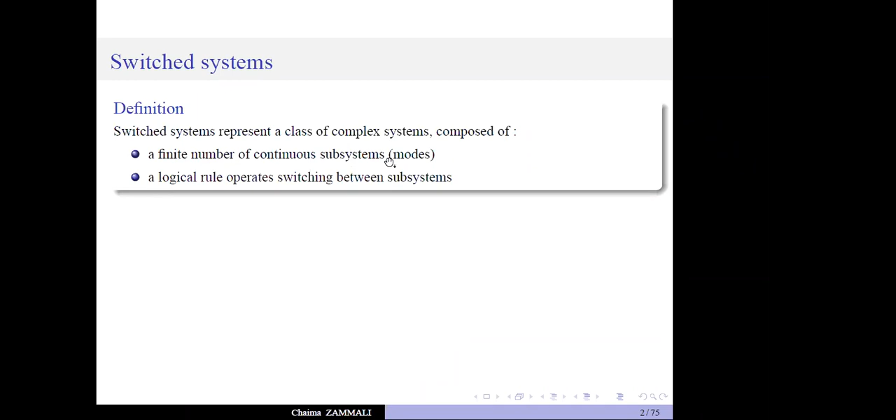The main interest of studying switched systems is justified by their hybrid dynamics, continuous and discrete, and their ability to represent and control a wide range of industrial systems in many engineering fields, such as opening and closing power switches, biological cells duplication and division, aircraft moving safely through the airspace system, and many other examples.

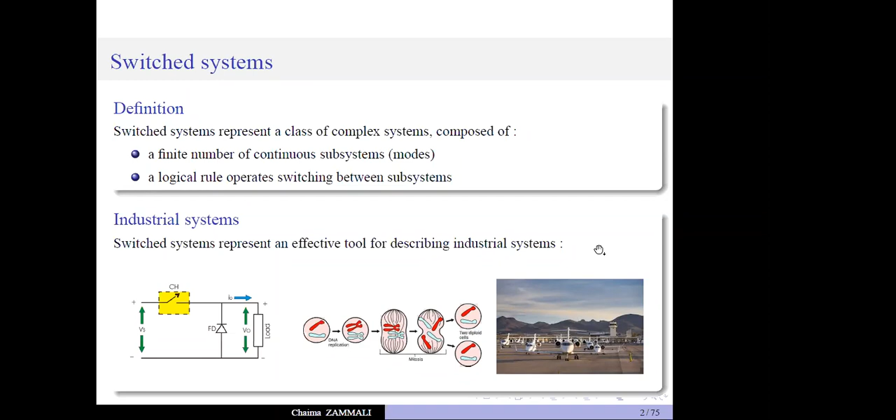Over the last years, switched systems have been widely studied in the frame of state control, state stability, state estimation, and fault diagnosis. In the context of this project, we are interested in state estimation and fault detection for switched systems. In fact, in most practical cases, the entire state cannot be completely measurable.

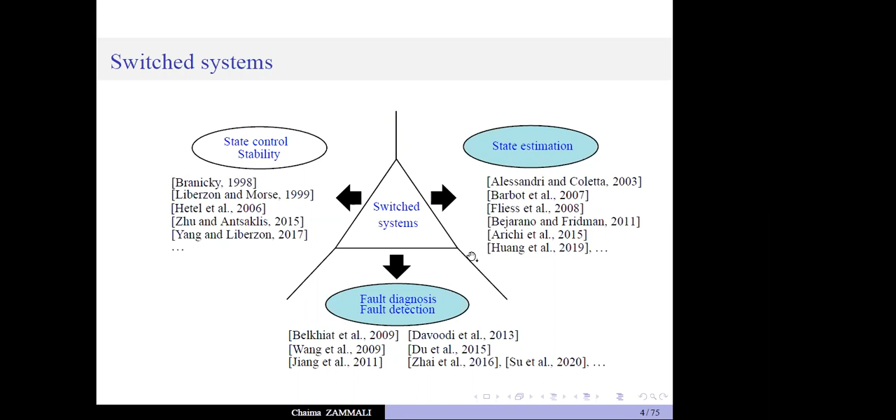This is due to technical or economic reasons, like the high cost of sensors or their insufficient precision. So the implementation of a state estimation algorithm is needed in order to reconstruct the internal state vector from the input and output measurements. This step, the state estimation step, is primordial in order to deal with fault detection for switched systems. Let us begin with the state estimation topic.

A number of results are available for the estimation problem using Luenberger observers, Kalman filter, sliding mode observers. Other observers like adaptive and unknown input high gain observers are also investigated in order to solve the estimation problem.

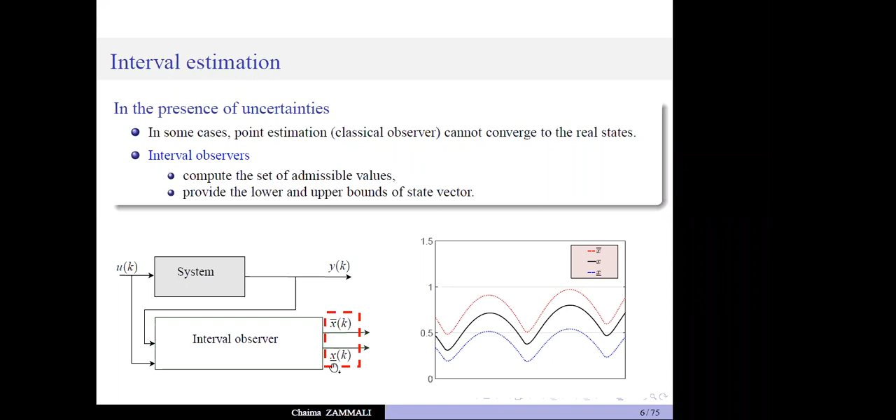Most of the existing results focus on point estimation, which in some cases cannot converge to the real state due to the presence of uncertainties. To handle this problem, interval observers are considered as an alternative by computing the set of admissible values and providing the lower and upper bounds of the state vector.

In the literature, interval estimation has been introduced for biological systems in the work of Gouze, and then applied for different classes of systems, such as linear time invariant systems, linear time varying, linear parameter varying, and nonlinear systems.

Interval estimation has been also considered in the case of continuous time as well as discrete time switched systems. Actually, most of the existing results on interval estimation for switched systems are developed in linear time invariant settings.

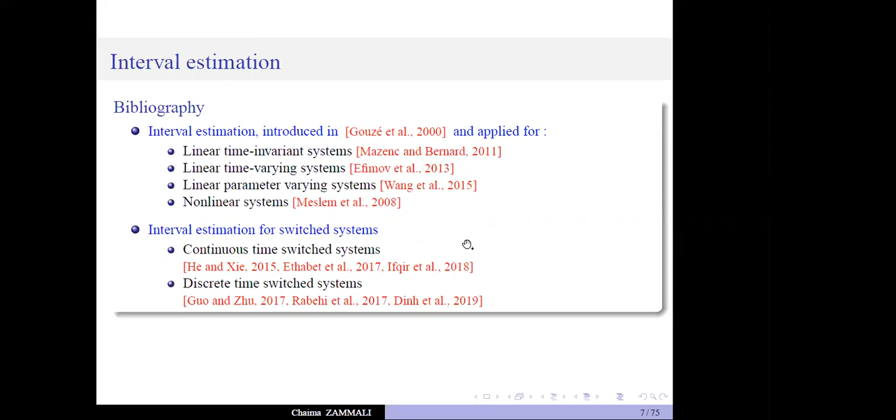That's why the main challenge of this project is to propose a new interval observer for a class of linear parameter varying switched systems subject to unknown but bounded disturbances and using a polytopic formulation. The main advantage of using the LPV formulation is that it provides an elegant way to deal with nonlinear systems.

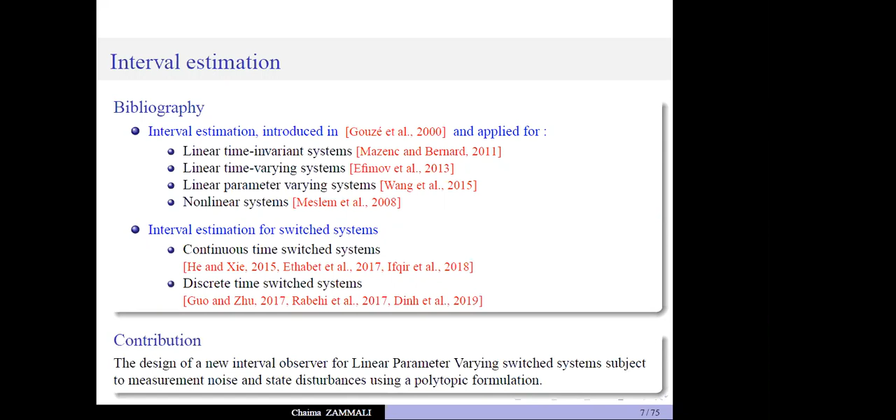As mentioned before, the state estimation is primordial in order to deal with fault detection. And as well as interval state estimation, interval observers have been also proven to be effective in fault detection.

In fact, they can deal with large uncertainties, and they can provide a systematic way for residual evaluation without designing residual evaluation functions and threshold generators.

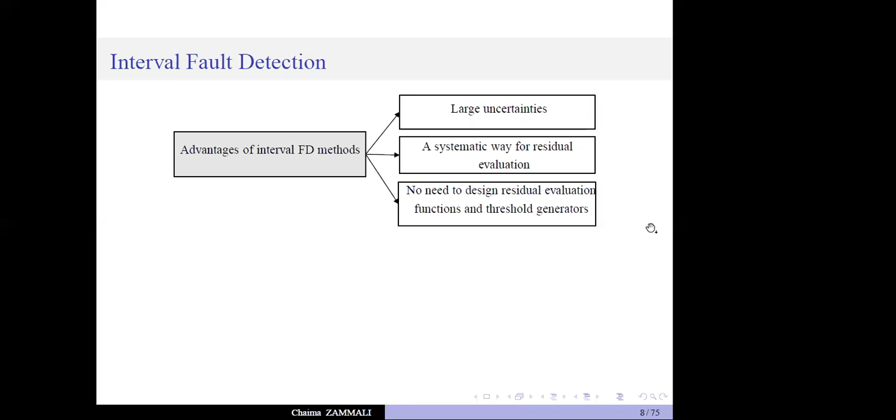In the literature, interval observers have been considered for uncertain linear systems, nonlinear systems, linear parameter varying, and more recently for switched systems in order to deal with fault detection.

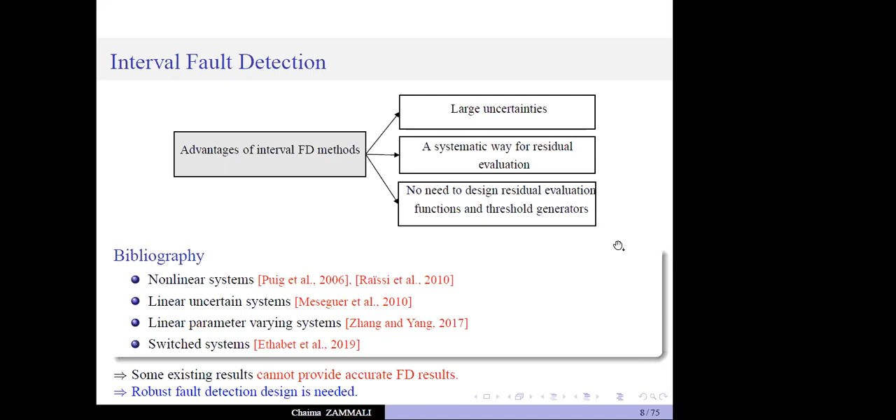However, most of or some existing works cannot provide accurate fault detection results since the effect of uncertainties is not minimized. That's why one of the essential requirements is to consider robustness against uncertainties.

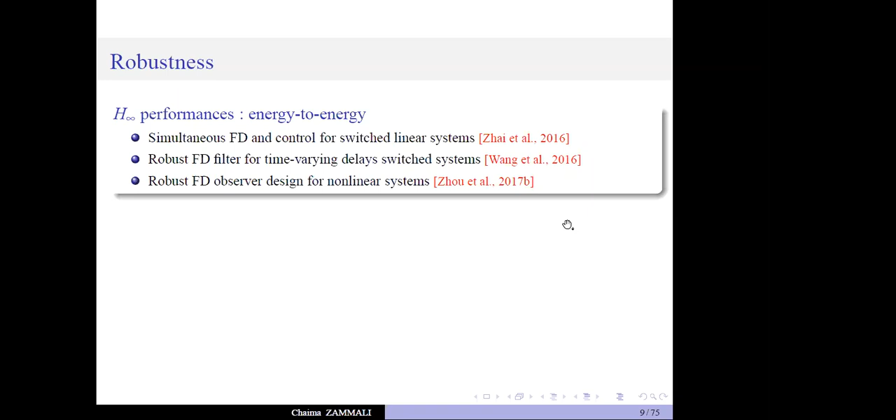Robustness can be analyzed using the H-infinity performances. In fact, the H-infinity norm is a measurement of energy to energy gain, which requires that the uncertainties should be energy bounded. However, from a practical point of view, some signals cannot always be considered energy bounded, but have instead bounded peak values. Therefore, it is more reasonable to use the L-infinity performances, which describe the peak-to-peak performance index.

In the context of this project, we aim to propose an interval method to detect sensor faults for a class of discrete-time switched systems using the L-infinity formalism.

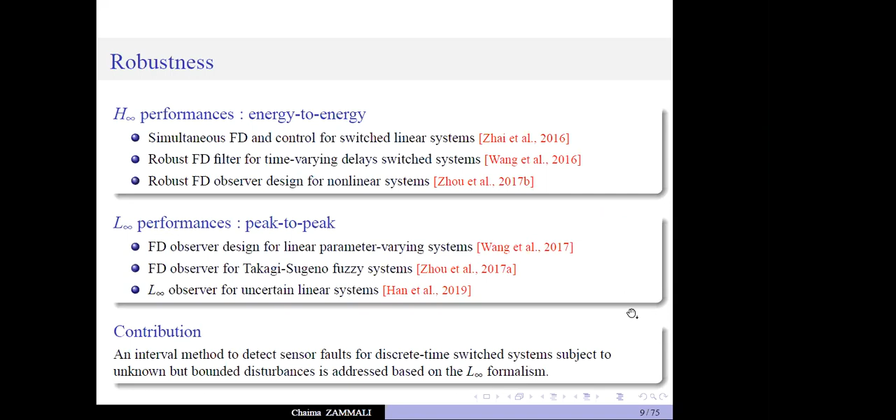On the other hand, interval methods are based on positive system theory, which requires that the error system is simultaneously cooperative and stable, which is a restrictive and conservative assumption. That's why some authors propose a coordinate transformation to relax the cooperativity constraint. However, it is still hard to merge the coordinate transformation with some performance constraint.

So in view of this major problem, zonotopic and ellipsoidal analysis are developed in order to provide accurate fault detection results without considering the cooperativity assumption. To the best of our knowledge, zonotopic and ellipsoidal analysis for switched systems in order to deal with fault detection have not been fully considered in the literature.

That's why the first contribution is based on a novel robust fault detection method using a novel pole assignment technique, which is used to improve fault sensitivity and where the residual evaluation is based on the zonotopic method.

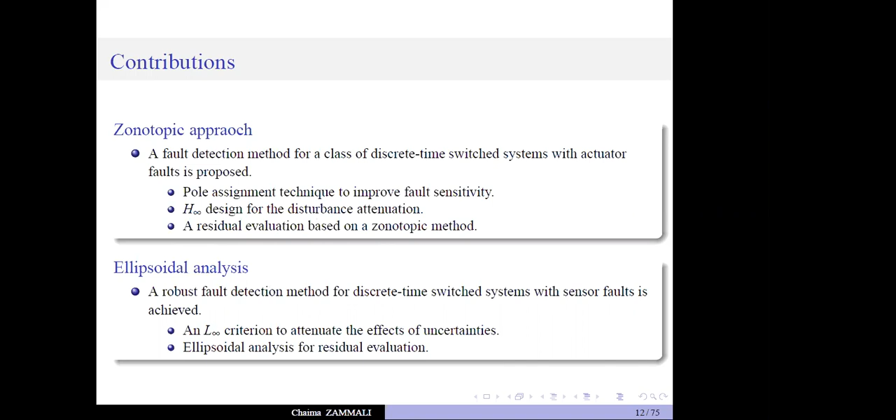In the second contribution, a robust fault detection method is considered using L-infinity performances with ellipsoidal analysis.

So after introducing the context of this presentation, we are going to give some results about interval estimation in the case of synchronous switched systems, and then set membership fault detection frameworks for switched systems will be presented using interval, zonotopic, and ellipsoidal analysis. And finally, we give a conclusion.

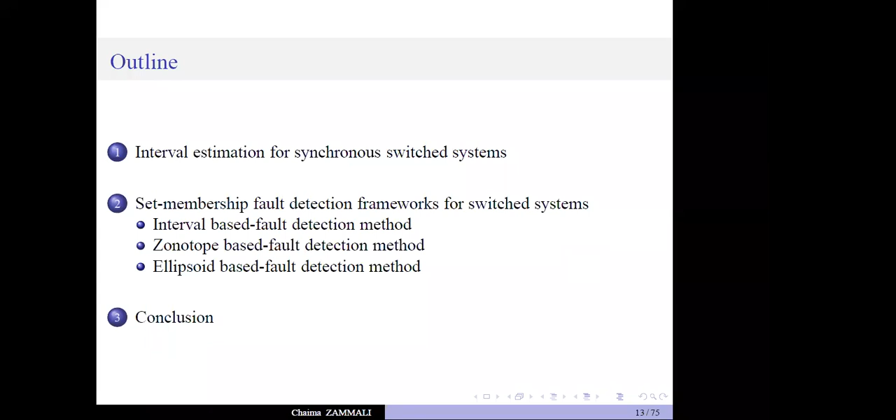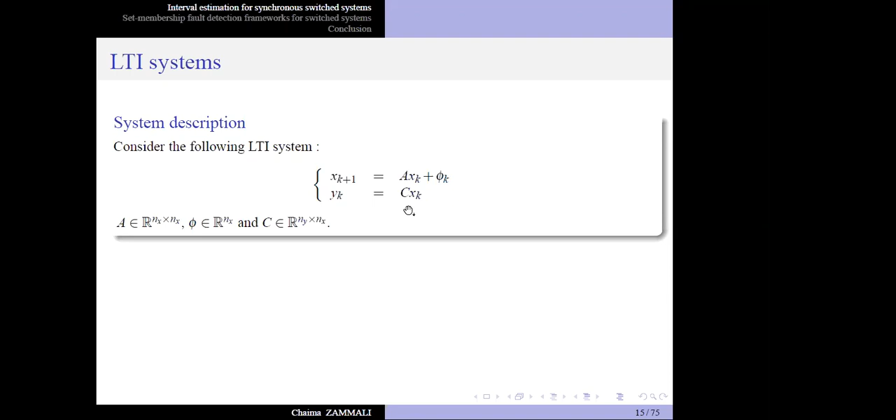We begin by the interval estimation in the case of synchronous switched systems. We consider the following linear time invariant system, where the matrix A is the state matrix, phi is the input function, and C is the output matrix.

For this system, we assume that there exist two known functions, overline and underline phi, such that phi is between two bounds. We suppose that the initial state x0 satisfies the following inclusion. We assume also that there exists a gain L such that A minus LC is Schur stable and non-negative. And finally, the pair A, C is supposed to be detectable.

Under these assumptions, the goal is to estimate two states, an upper state, which is noted by overline X, and a lower one, which is noted by underline X, satisfying the following inclusion.

The interval observer structure, which is proposed by several authors in the literature when considering a linear time invariant system, is given by this set of equations, where L is the observer gain to be designed to satisfy two conditions.

The first condition is the cooperativity property, which means that the state stays between two bounds. And the second condition is the stability of the upper and lower bounds of the estimation errors.

We begin by the cooperativity property. Here we have the definition of a cooperative system. So if A is a non-negative matrix, x0 is higher or equal to 0, and uk is higher or equal to 0, then we can say that this system is cooperative or non-negative.

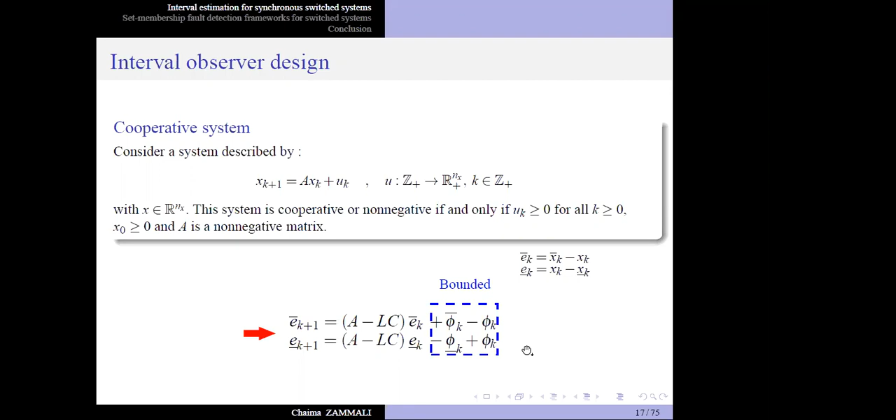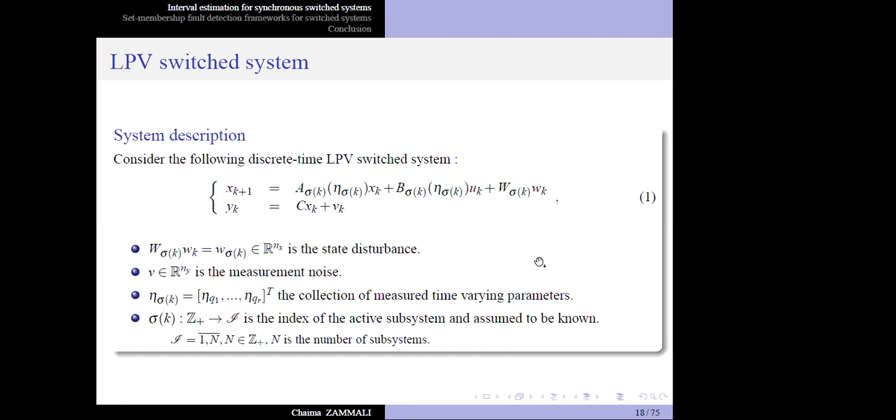We consider in this presentation the following discrete time LPV switched system, where W sigma is the state disturbance, V is the measurement noise, eta sigma is the collection of measured time varying parameters, and we denote by sigma the index of the active subsystem, which is supposed to be known. For ease of notation, we will use Q as the index of the active subsystem.

Some assumptions are required to design the interval observer. First, AQ and BQ depend affinely on eta Q. We assume that the initial state x0 satisfies x0 between two bounds. The measurement noise and the state disturbances are unknown but bounded, and eta Q are constrained in polytopes which are noted by EQ, and we denote by eta QI the vertices of each polytope. And finally, for all the vertices, the pairs AQ, eta QI, C are detectable.

Under these assumptions, the goal is to design an interval observer for the class of discrete time linear parameter varying switched systems using a polytopic formulation. To that end, the proposed interval observer structure is given by this set of equations, where LQ are the observer gains to be designed to satisfy the cooperativity and the stability conditions.

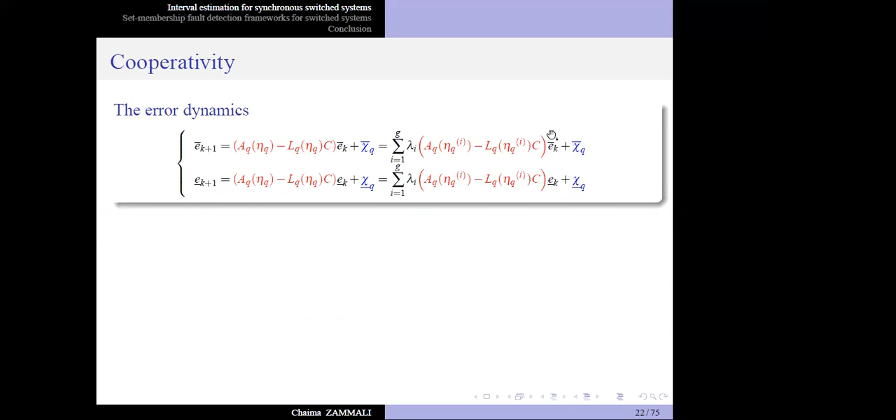Also, the same thing for LQ eta Q: it is equal to the sum over I of lambda I LQ eta QI, where these matrices are the vertices of the observer gain of each polytope. According to the convex form, the error dynamics can be expressed on the vertices of each polytope.

So proving that these matrices are non-negative is reduced to proving that these matrices are non-negative on their vertices.

In addition, we have overline chi higher or equal to 0, since the state disturbance and the measurement noise are supposed to be unknown but bounded. By construction, we can prove that the state is upper bounded, and the same arguments could be used to prove that the state is lower bounded. Thus, this inclusion is satisfied: the state is between two bounds.

So, apart from the cooperativity assumption, which is relaxed thanks to the polytopic shape of the time-varying parameters and expressed on the vertices of each polytope, the stability of the proposed observer should also be satisfied.

To that end, we begin with the definition of stability analysis, which is the property of a system to return to its equilibrium point after it has been deviated from its initial position.

In the presence of unknown but bounded disturbances and noises, input-to-state stability could be introduced. In fact, it provides a framework about stability with respect to input perturbations. It means that a system should be bounded if bounded inputs are injected, and should converge to equilibrium when inputs tend to 0.

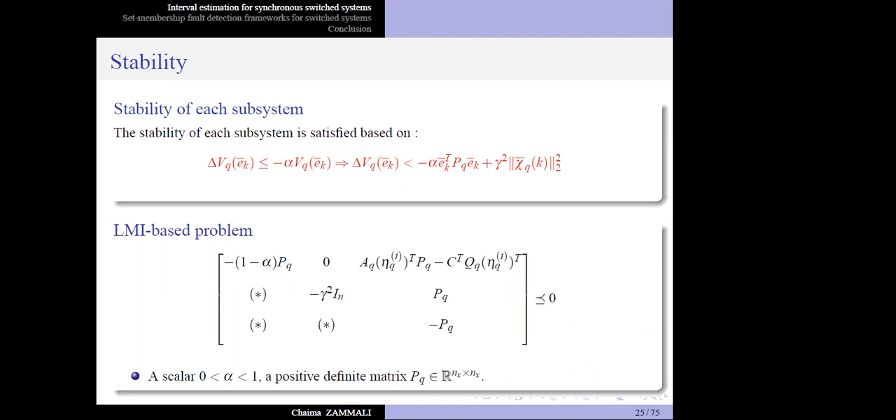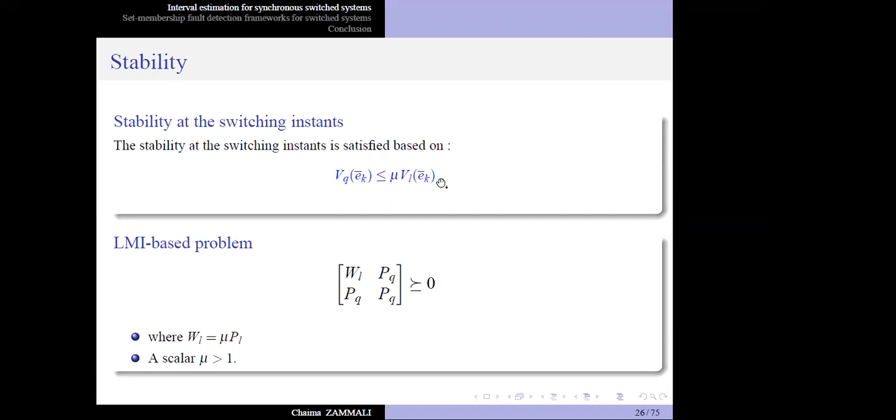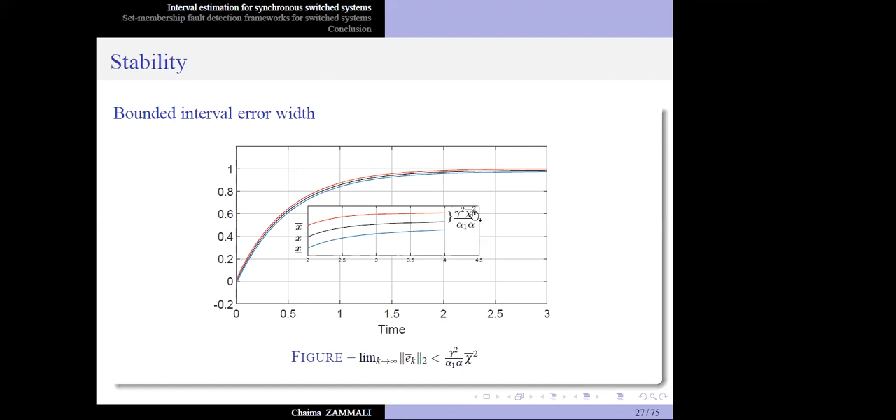In addition, it can also be easily shown that the upper estimation error is bounded by this expression, which should be made as small as possible in order to enhance the performance of the proposed observer. So minimizing this expression is reduced to minimizing the value of gamma.

In addition to minimizing the value of gamma, we aim to minimize the value of mu in order to look for an optimum dwell time, leading to the following objective function. As said before, the same arguments could be used to prove the boundedness of the lower estimation error.

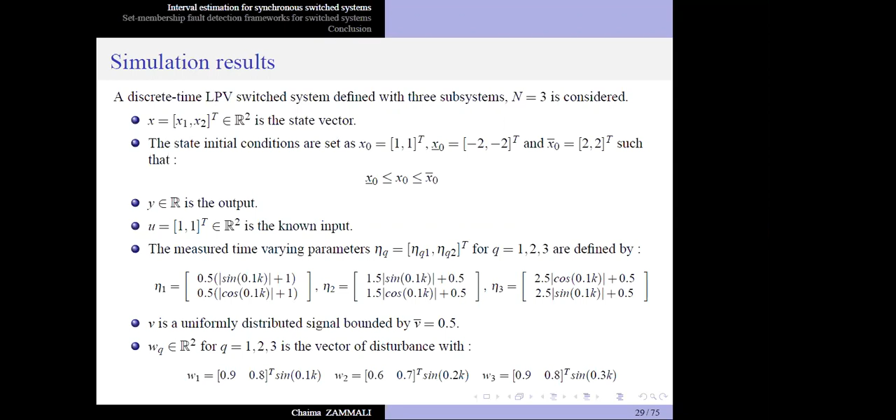So in the simulation study, a discrete time LPV switched system is defined with 3 subsystems. The state initial conditions, the time-varying parameters, the state disturbance, and the measurement noise are supposed to be unknown but bounded.

The parameters alpha, alpha 1 are chosen to solve the optimization problem. With the Lyapunov matrices and the observer gains given by these values, we get mu equal to 2, which gives an optimum dwell time higher than 0.301, and we get gamma equal to 2.12, which gives an optimum interval width.

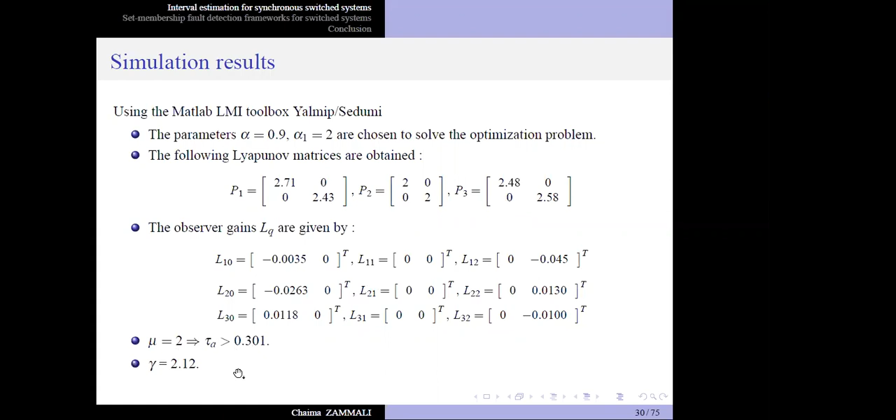So the simulation results are depicted in these figures. The first figure shows the evolution of the switching signal, indicating the active subsystem.

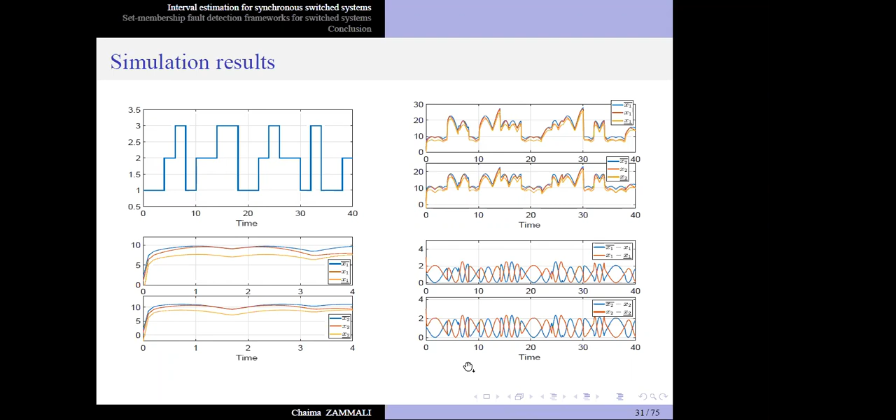From the second and third figures, we can see that the state is between two bounds. And from the last one, we can see that the upper and lower estimation errors are always positive and bounded, which illustrates the efficiency of the proposed interval estimation in the case of a synchronous switched system.

After giving some results about interval estimation for the case of synchronous switched systems, we are going to present set membership fault detection frameworks for the same class of systems, using interval, zonotopic, and ellipsoidal analysis.

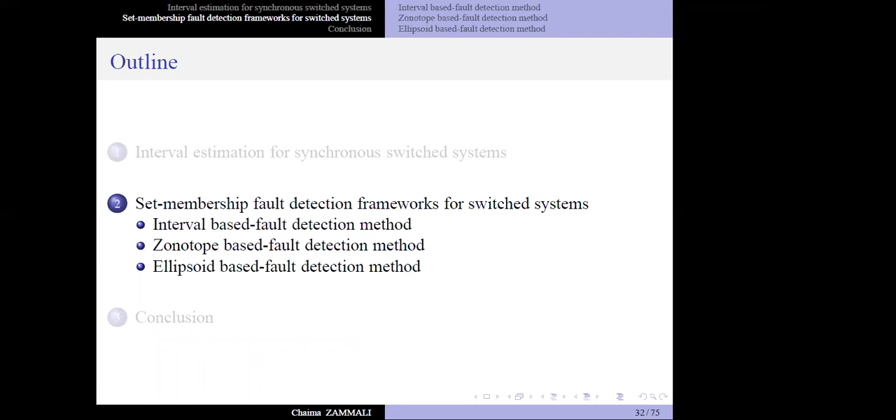We begin by the interval-based fault detection method, and we consider the following discrete-time switched system. The matrices AQ, BQ, DQ, even with appropriate dimensions. For this system, we assume that the measurement noise and the state disturbance are unknown.

But bounded. We suppose that the initial state satisfies this inclusion. The initial state is between two bounds. We suppose that the pairs AQC are detectable. Under these assumptions, the fault detection interval observer is proposed as follows, where overline and underline Xi are intermediate variables, overline underline X, overline underline Y, and R are respectively the estimated

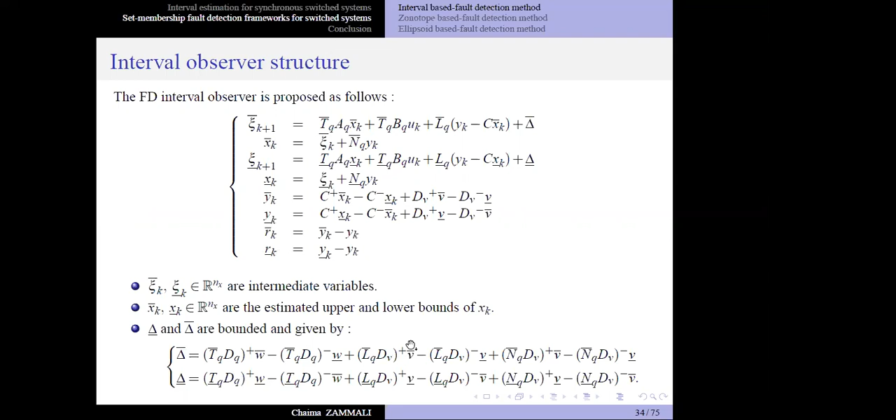Upper and lower bounds of the state, the output, and the residual signal. Overline underline delta are bounded expressions since they depend on the boundedness of the state disturbance and the measurement noise. We denote by overline underline LQ the observer gains to be designed.

And we have these matrices are supposed to be constant and should be designed to satisfy these conditions. It is worth noting that if TQ is equal to the identity matrix, NQ is equal to the zero matrix, so the proposed interval observer is equivalent to the classical interval observer. In the case of classical interval observers, the gain LQ should be designed such that these matrices are non-negative, which is a restrictive and conservative assumption. So by introducing the weighted matrices TQ and NQ, the proposed fault detection observer can reduce the conservatism of gain matrices and can provide more design degree of freedom.

So using the proposed interval observer, which is based on the TNL structure, the non-negativity, the stability, and robustness against uncertainties will be studied in the next slides. We begin by the non-negativity property. In fault-free case, the relation X between two bounds is satisfied if these matrices are non-negative.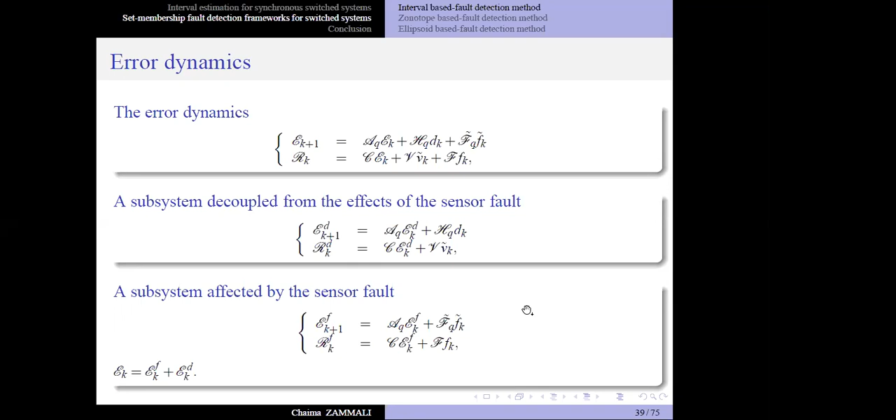So in order to facilitate the analysis, the error dynamics is split into subsystems. One is decoupled from the effect of the sensor fault, and the other one is only affected by the sensor fault. Based on this representation, the goal is to compute the fault detection observer gains such that the error system is stable and the residual signal satisfies the following L infinity performance. To achieve these two points, sufficient conditions are given in terms of linear matrix inequalities using multiple quadratic Lyapunov functions.

So after designing the fault detection observer gains, the fault detection decision is based on determining whether the zero signal is excluded from the residual boundaries or not. In fact, in the fault-free case, the output signal is consistent with the estimation of the proposed interval observer, so the zero signal is between two bounds.

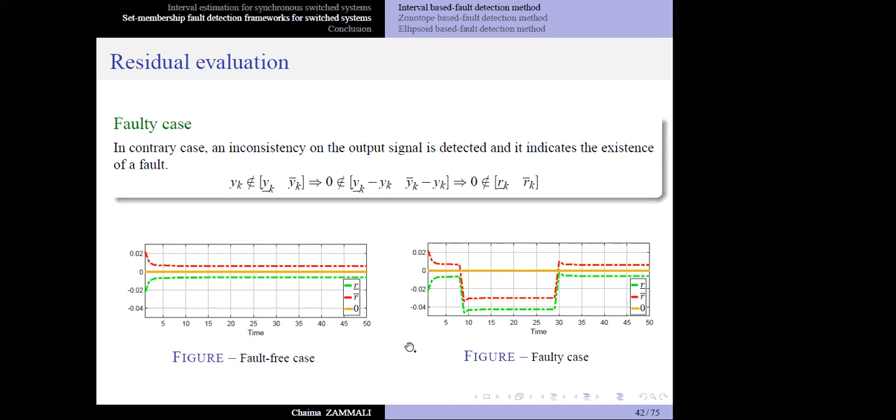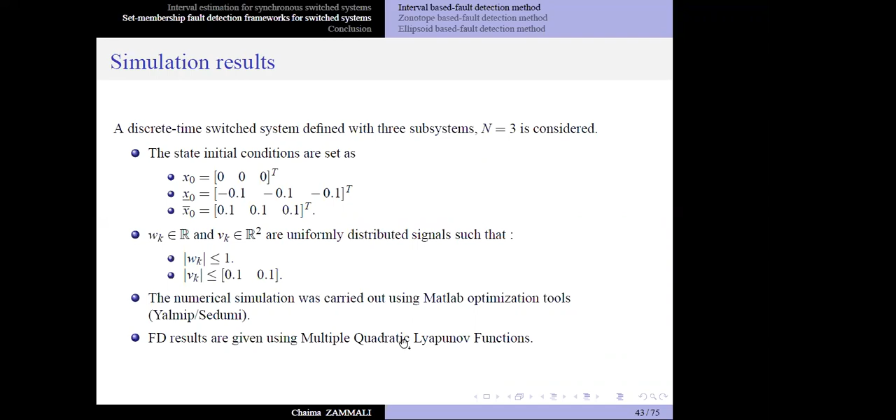So to highlight the effectiveness of this method, we consider a discrete-time switched system with 3 subsystems where the initial state conditions, the output, and the state disturbance are supposed to be unknown but bounded. The stability analysis is based on multiple quadratic Lyapunov functions. In the simulation study, the first figure shows the evolution of the switching signal, and the second figure shows the evolution of the fault, which is supposed to occur between the time instants 30 and 50.

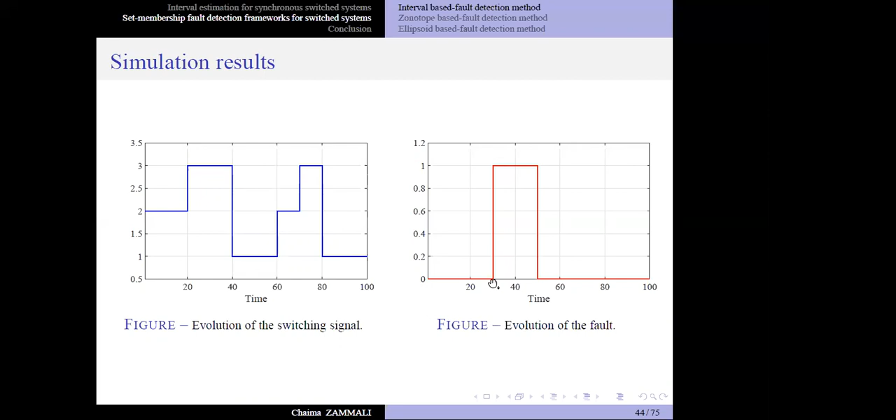In the fault-free case, we can see that the cooperativity assumption is ensured and the zero signal is between the bounds. When a fault occurs at time instant 30, the fault can be detected at time instant 31, and the zero signal is excluded from the residual boundaries.

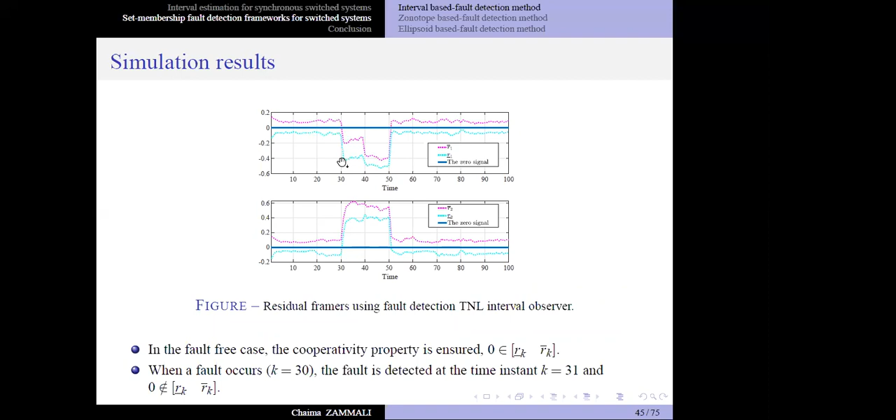In the case of a small fault, we have performed a comparison between the TNL method and the classical interval observer. We can see that using the proposed TNL method, the zero signal is excluded from the residual boundaries, shown in dashed lines, when a fault occurs. However, when using classical interval observers, the zero signal is always between the upper and lower bounds, even after the occurrence of the fault.

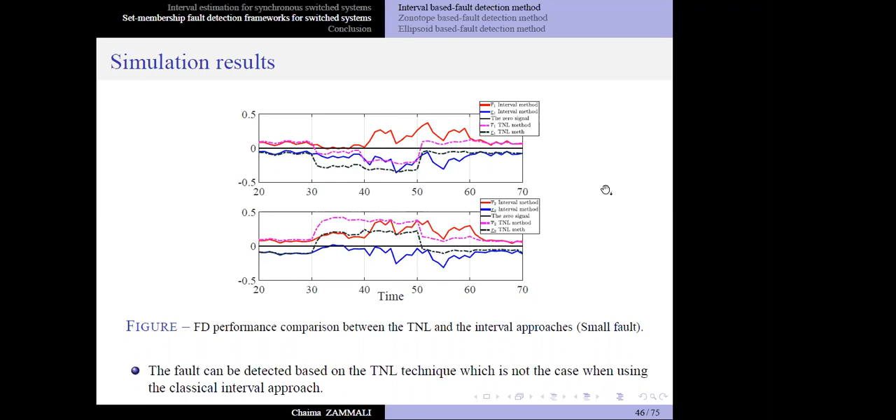So we can say that the proposed interval-based fault detection method using the proposed TNL structure provides accurate fault detection results, and its implementation is very simple and does not require any computational complexity. However, this approach is based on the non-negativity of these matrices.

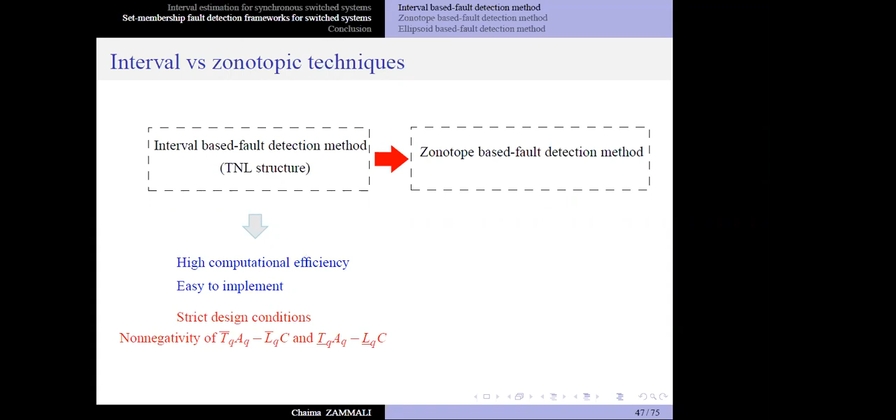In view of this drawback, zonotopic-based fault detection methods could be developed to provide accurate fault detection results with relaxed design conditions.

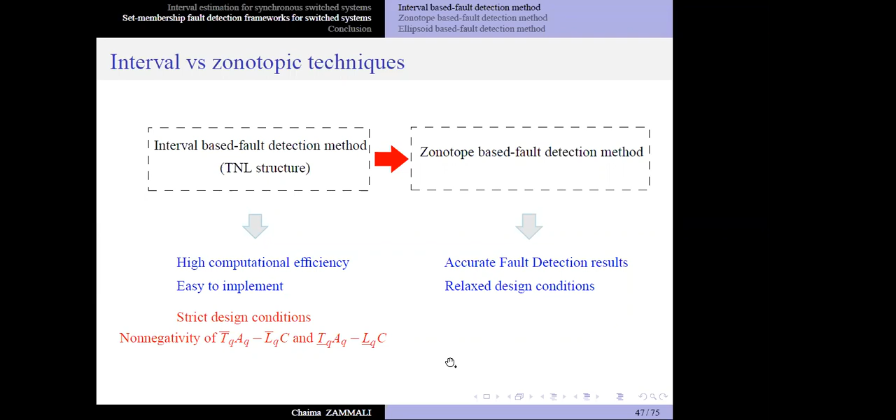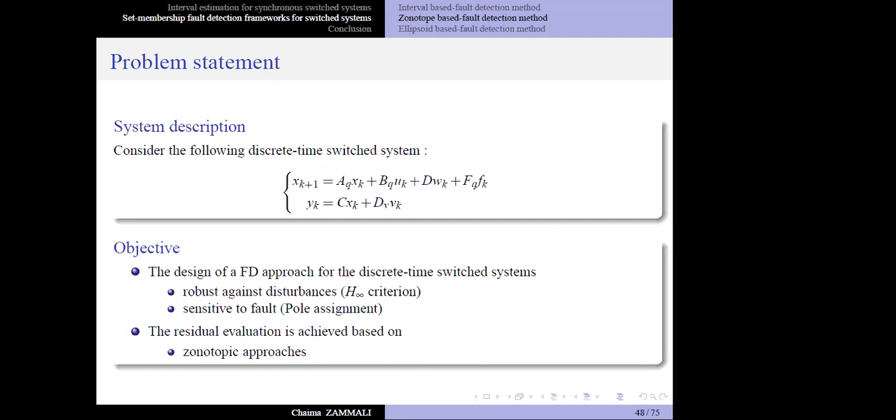To that end, in this part of my talk, we are interested in designing a robust fault detection method using zonotopic analysis. The proposed approach is robust against uncertainties based on the H infinity criterion and sensitive to fault using a novel pole assignment technique.

Before giving some details about this approach, we give the definition of the zonotope. The zonotope is the affine image of a hypercube, given by the couple P, H, where P is the center of the zonotope and H denotes the generation matrix of the zonotope. Here are two examples: a three-order zonotope in a two-dimensional space, and a three-order zonotope in a three-dimensional space.

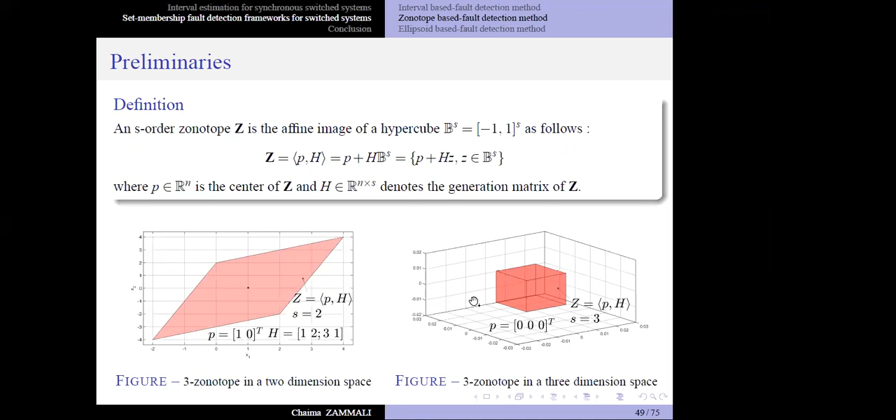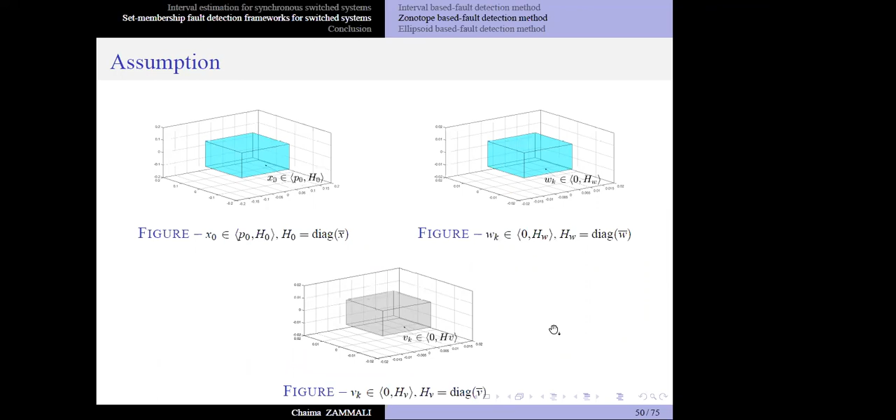For the proposed system, we suppose that the initial state, the state disturbance, and the measurement noise are unknown but bounded by zonotopes, where H0, HW, and HV are the generation matrices. Under this assumption, the proposed fault detection observer structure is given by this set of equations, where x hat is the estimation of x, and LQ is the observer gain to be designed.

For this proposed observer, the objective is to compute the fault detection observer gains LQ that increase the sensitivity of the residual signal to fault using a novel pole assignment technique, and reduce the effect of uncertainties using the H infinity performance.

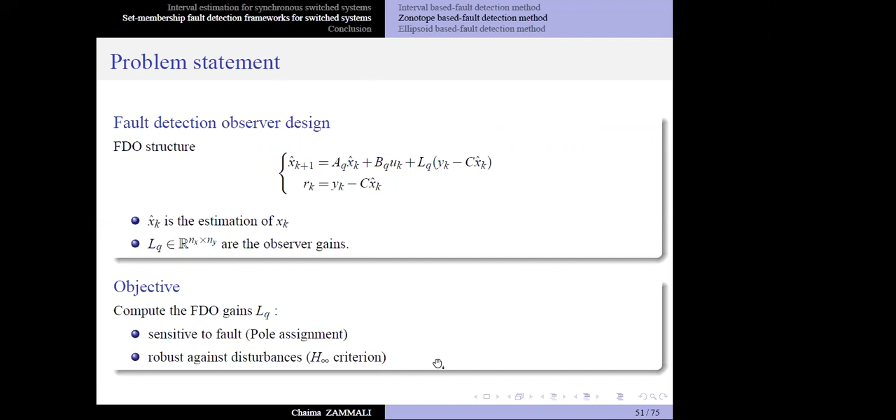Based on the following lemma, which gives the general solution of the equation AB equal to C, the fault detection observer gains can be obtained and given by this expression, where S is an arbitrary matrix to be designed.

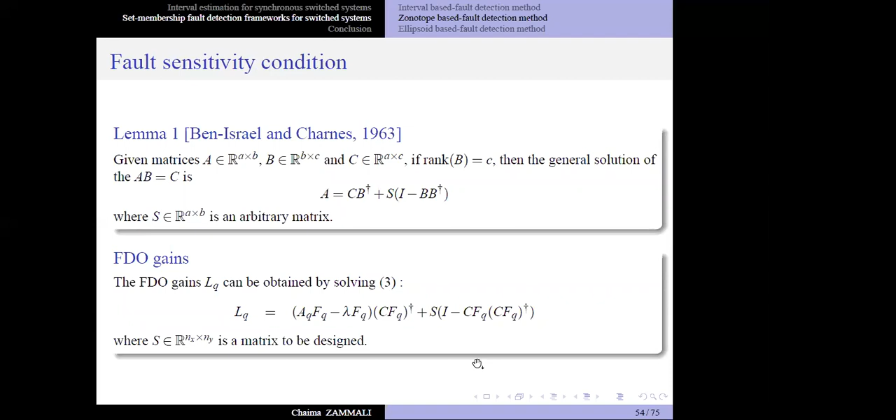In addition to the fault sensitivity condition, the disturbance attenuation condition should also be ensured in order to provide more accurate fault detection results. In this part of my talk, the disturbance attenuation is based on H infinity performance, and the design conditions are given in terms of linear matrix inequalities.

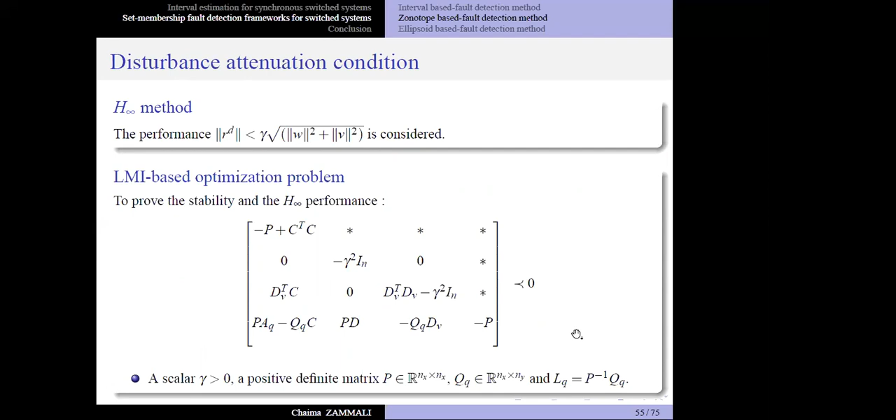Once fault sensitivity and robustness against uncertainties are achieved, the fault detection decision is based on determining whether the residual signal is excluded from the residual zonotope or not. The residual zonotope R is given by the couple 0, RK, where this matrix satisfies the following iteration equation.

This notation represents the complexity reduction operator. When using zonotopic techniques, the reduction operation is used to constrain a high-dimensional zonotope with a lower dimensional one. It is worth noting that more accurate fault detection results could be achieved when using higher dimensional zonotopes.

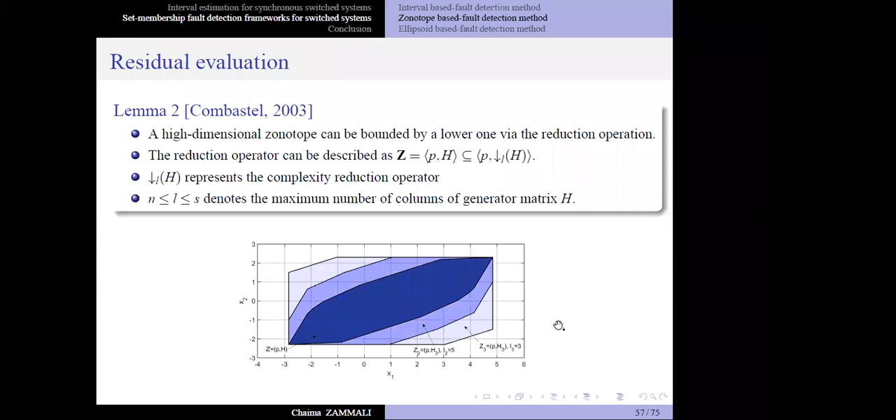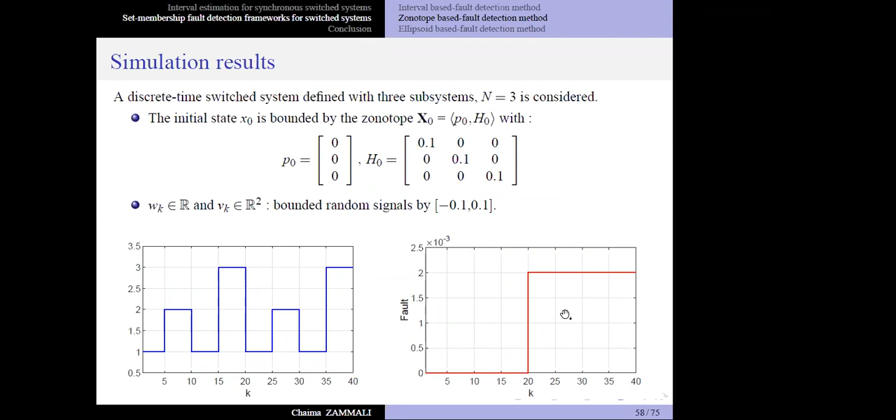In the simulation study, a discrete time switched system with 3 subsystems is also considered. We suppose that the fault occurs after time instant 20.

In the simulation study, we have performed a comparison between the proposed fault detection observer and a method without considering optimization tools. It means a method without considering robustness against uncertainties and without considering the novel pole assignment technique.

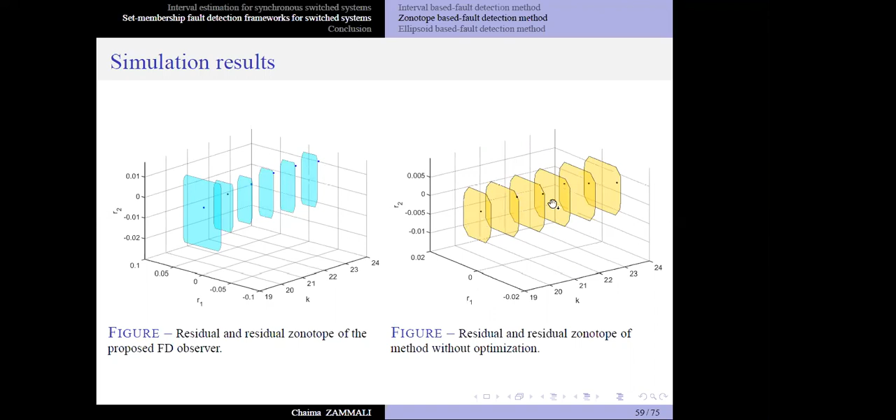We can see from this figure that the residual signals, in black points, are excluded from the residual zonotopes when a fault occurs. However, when using a method without optimization, the residual signal is always included in the residual zonotopes, meaning the fault cannot be detected.

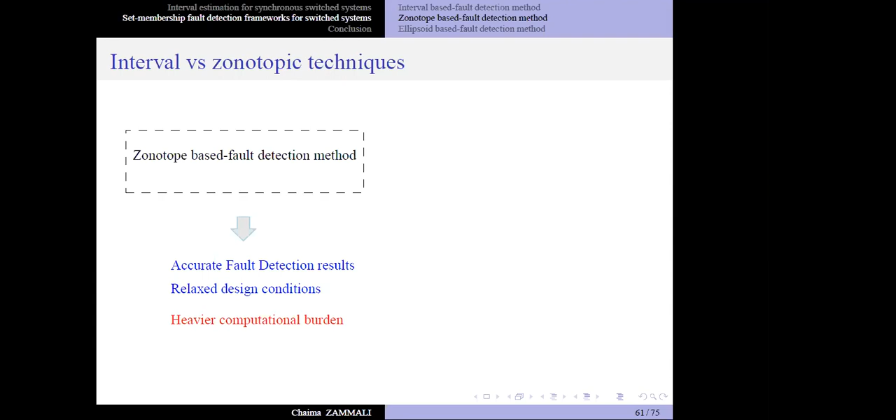So we can say that the proposed zonotope-based fault detection method provides accurate fault detection results with relaxed design conditions, based on higher dimensional zonotopes. However, we should note that the additional dimensional growth of the zonotopes may cause heavier computational burden.

That's why ellipsoidal analysis could be developed and considered as a good trade-off between fault detection accuracy and computational complexity. The ellipsoidal analysis is based on simple matrix calculations and does not require any reduction operator.

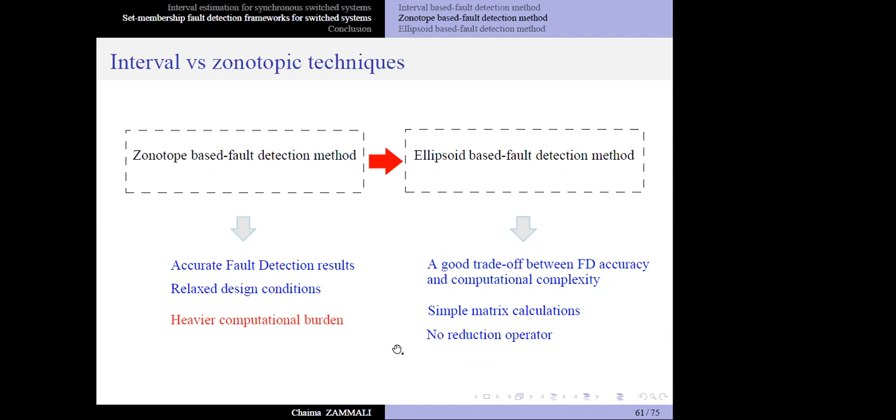In the last part of this section, we aim to propose a robust fault detection method using ellipsoidal analysis for the following discrete time switched system subject to sensor faults.

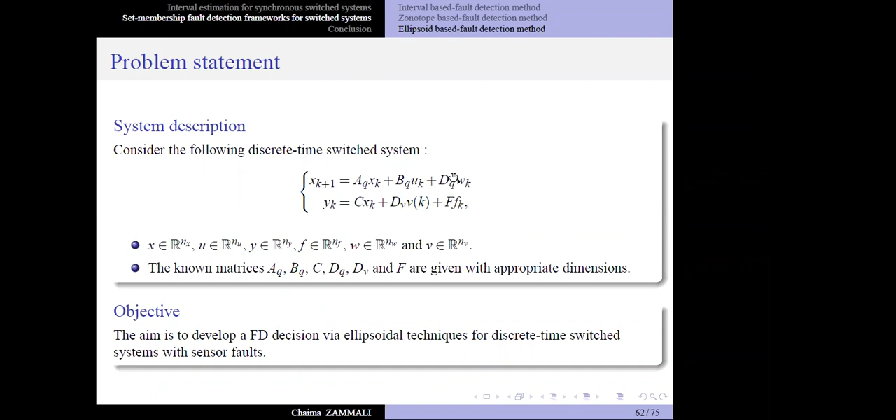We give the definition of an ellipsoid set, which is given by the couple C, X, where C is the center of the ellipsoid and X is a symmetric positive definite matrix, which represents the shape and the size of the ellipsoid.

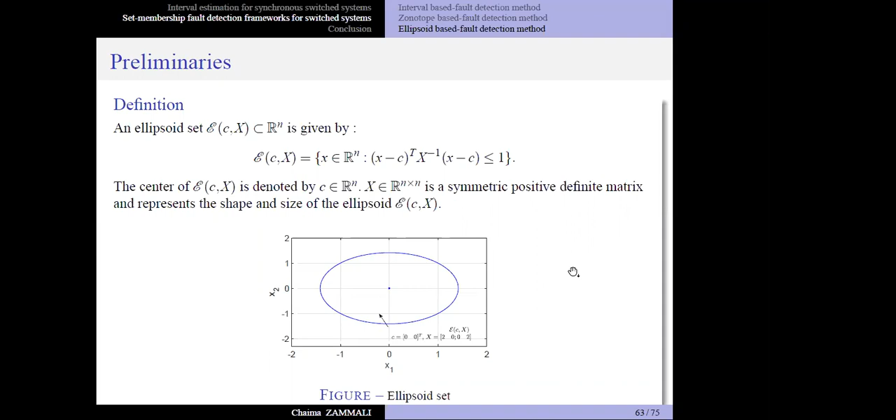We suppose that the initial state, the state disturbance, and the measurement noise are unknown but bounded by ellipsoids. Under this assumption, the proposed fault detection observer is based on the TNL structure, where T and N are constant matrices that should be designed to satisfy this condition.

It is worth noting that if TQ is equal to the identity matrix and NQ is equal to the zero matrix, the proposed fault detection observer is reduced to the commonly used Luenberger form. So by introducing T and N, the proposed structure can provide more design degrees of freedom.

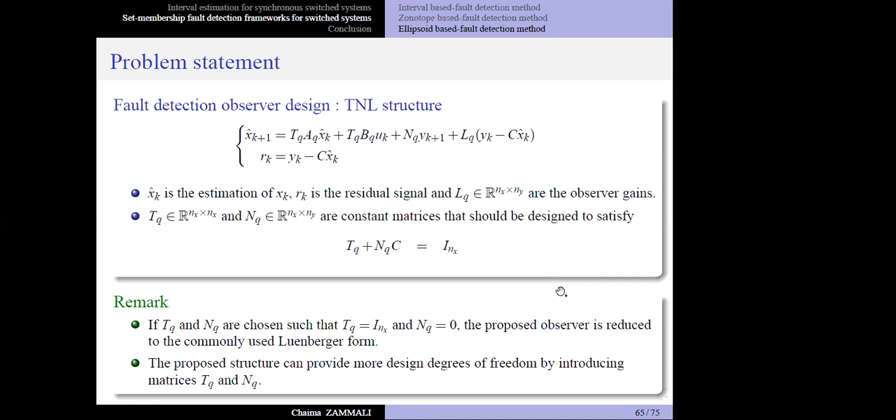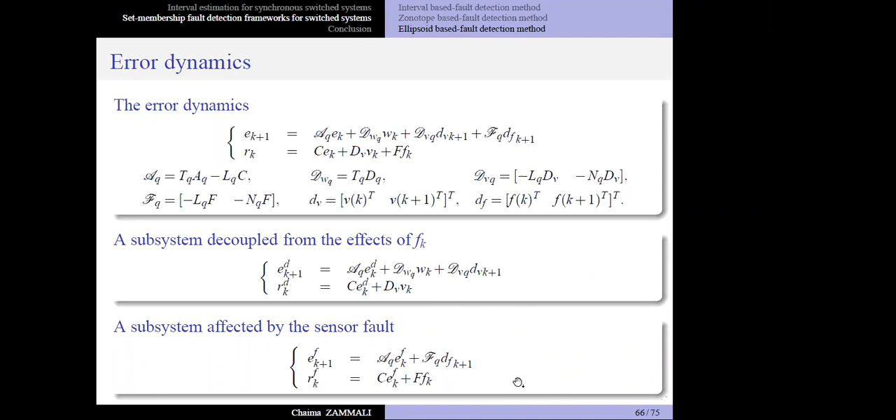In order to facilitate the analysis of the error dynamics, it is split into subsystems, one decoupled from the effect of the fault, and the other one only affected by the sensor fault. Based on this representation, the goal is to compute the fault detection observer gains such that the error system is stable and the residual signal satisfies the following L-infinity performance.

Sufficient conditions are given in terms of linear matrix inequalities using multiple quadratic Lyapunov functions.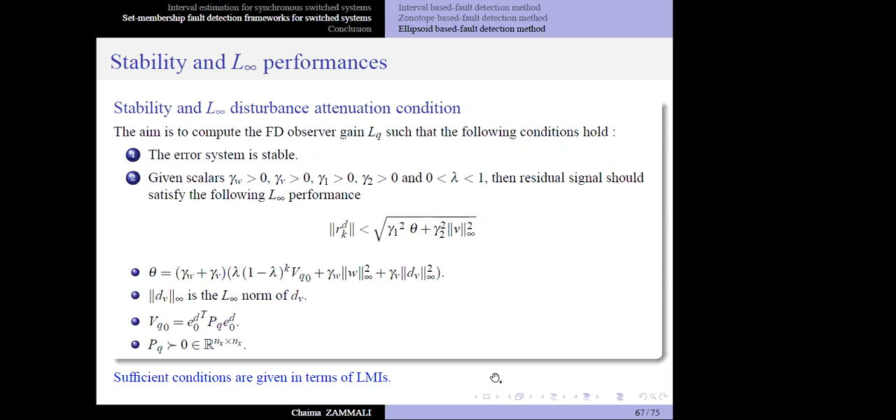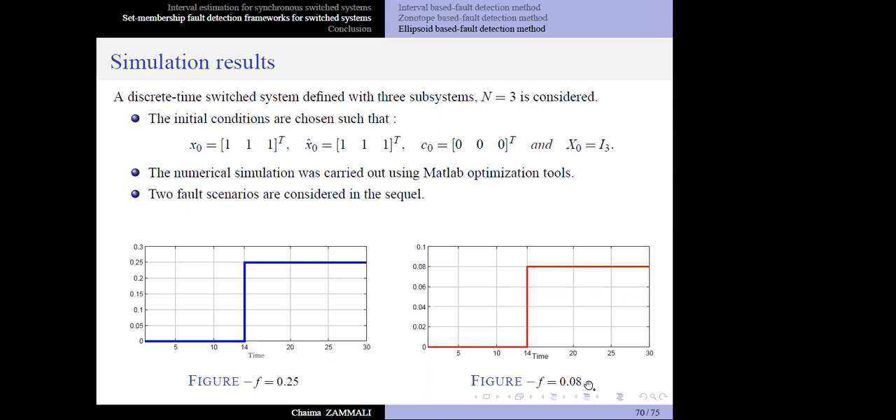To highlight the effectiveness of the ellipsoid-based fault detection method, we consider a discrete time switched system with 3 subsystems, and we consider 2 fault scenarios. In the first, the fault F has amplitude equal to 0.25, occurring after time instant 14. In the second, a fault with small amplitude F equal to 0.08 occurs after time instant 14.

In the simulation results, we performed a comparison between the proposed approach, based on the TNL observer, and a Luenberger observer. We can see that in both cases, when the fault equals 0.25 and when it equals 0.08, the residual signal is excluded from the residual ellipsoids.

However, when using a Luenberger observer, the small fault, shown in blue points, cannot be detected, and the residual signal is still included in the residual ellipsoid.

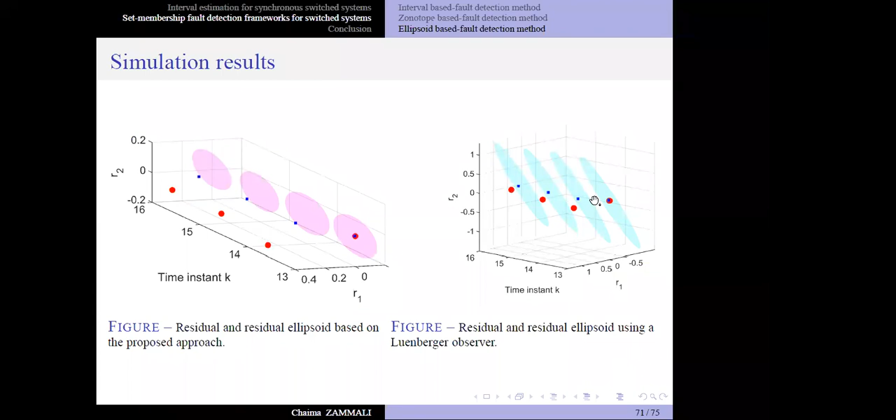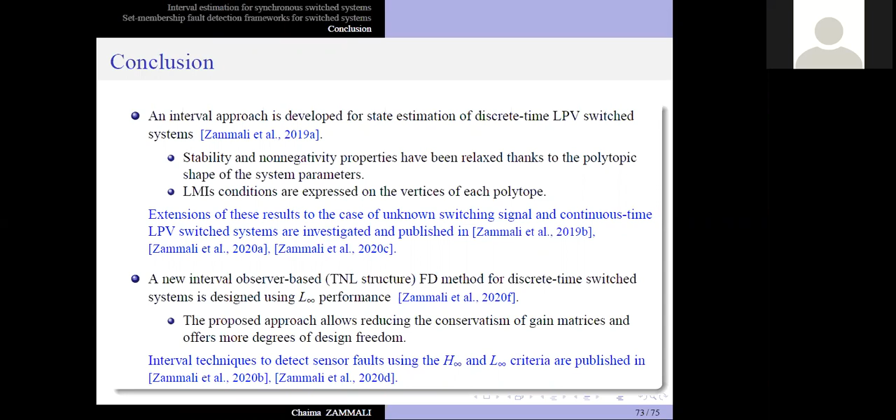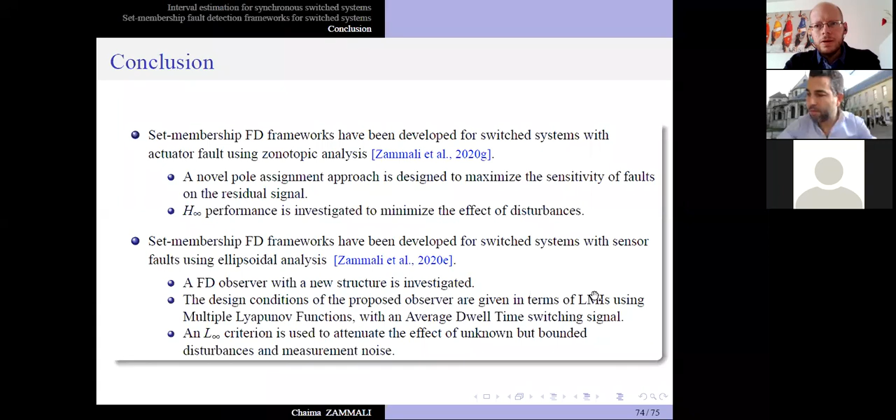At the end of this presentation, interval estimation and set membership fault detection techniques are investigated and achieved. First, an interval approach is developed where stability and non-negativity properties are relaxed based on the polytopic shape of the system parameters, expressed only on the vertices of each polytope. A novel interval observer-based TNL structure is also designed for a discrete-time switched system using L-infinity performance. Based on the set membership framework, zonotopic and ellipsoidal analyses are considered for switched systems in order to deal with fault detection. Thank you for your attention.

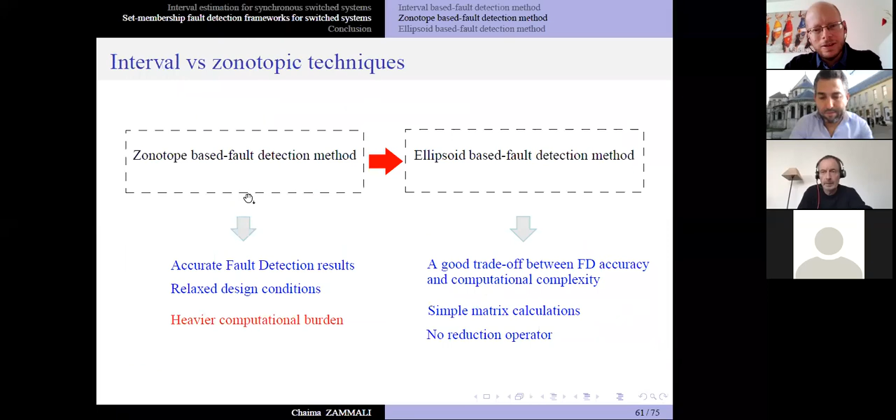One of your assumptions is that you know the output matrix exactly, the matrix C. Which modifications are necessary in the case that you also have some switch behavior in the system outputs, where, for example, in different modes you have different sensor configurations?

I think that there is no theoretical problem when using more than one C, meaning when using C sigma k, for example, there are no theoretical problems.

Okay, that means your original equations, everything you had as design criterion, just remains the same, just modifying the corresponding output matrix from mode to mode.

Yes. Okay, and maybe a second question right away. Your output equation doesn't depend on system inputs, but in many practical applications you have something like a feed-through term, depending, for example, on the control term, directly in the output equation. If you know this influence exactly, it's very easy - that's what you always do in the Luenberger design, you just subtract the influence of the input signal and that's it. But in cases where you have uncertainty in the corresponding feed-through term, for example uncertain gains, how would you deal with such a scenario?

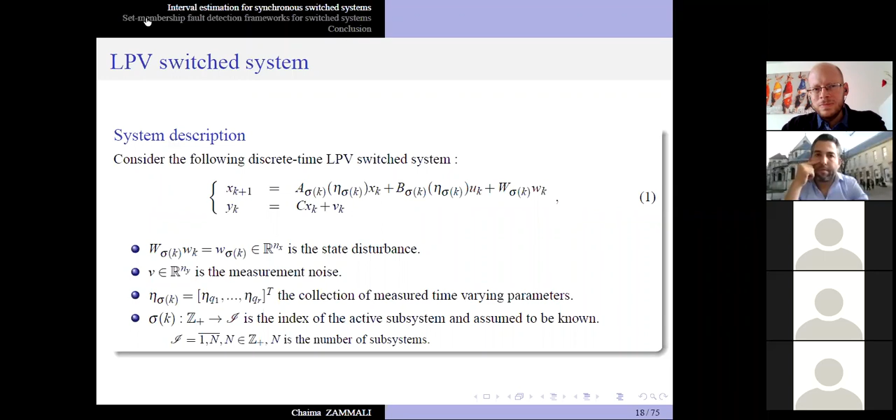In your observer design for the LPV switched system, you use 2 pairs of TNL matrices. My question is why do you use 2 pairs of TNL matrices? It seems that only a pair of TNL matrices is enough, I think. In the augmented system? Yes. I will see - you use 2 pairs, yes, of N and L. Yes.

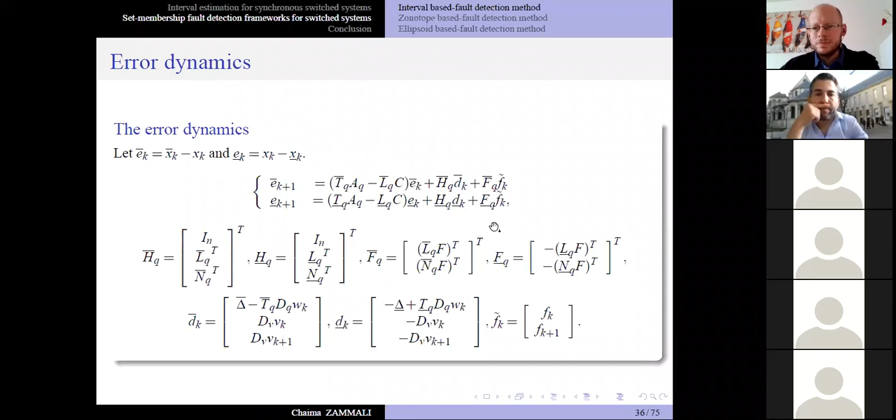We can use 1 pair of T, N, but in the augmented system we have 2 pairs of L, Q. So in the resolution, I don't know if I can explain it without using equations, but here, for example, the matrix A, we have overline TQ, AQ minus overline LQC. So if we put, for example, 1 TQ in the resolution, it will be overline LQ. No, it is just for the resolution of the augmented system. When using 1 TQ it will not be complicated, but we can prove a confusion between the overline LQ and underline LQ - but it is possible to use 1 TQ and 1 LQ.

Do you think you get some advantage by using 2 pairs of matrices?